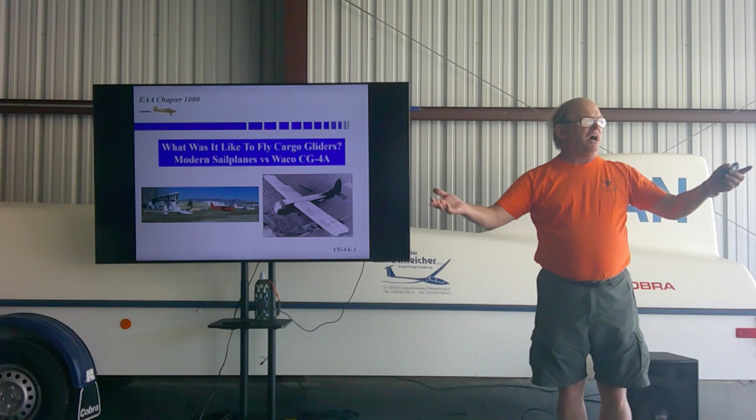Jeff. I originally created, or I'll talk some more about it, but I created this presentation for test pilot school way back in like 2009. And you will see through here, I'll refer to TPS, that's test pilot school, or TPS gliders. That was the way I was referring to what we would call the modern sailplanes, the stuff that's on the line over here, because that's what I was familiar with, and of course, all of you are too. So

I'm a retired major from the Air Force, retired back in 2003. I did go through the test pilot school as a flight test engineer back in 1989. I also taught in the Aero department at the Air Force Academy from 93 to 96. And I've been at the test pilot school as either military or civilian in some fashion ever since 1997. And Gary Aldrich helped get me checked out in gliders, and when he left, I became the TPS Chief Soaring Pilot

there. Some of you may have seen my airplane. This is a four-place Bearhawk that occasionally makes its way up here. I scratch-built it, had the first flight in 2008, the first real flight in 2009. This is landing at Oshkosh. 4 seats. The engine is essentially the same engine we have in the tow planes out here, except I spin it faster. So it goes up to 260 horsepower, and it's currently got about 920 hours on it.

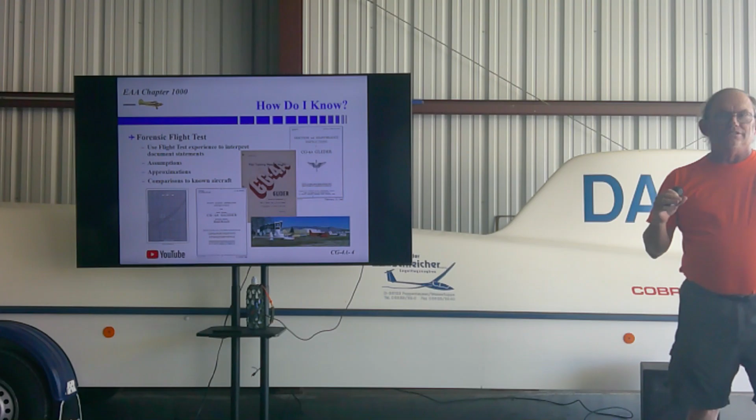So you might wonder, how does a young guy like me, okay, sort of young, you know, born in 61, how do I know anything about what a CG-4A was like? Well, I like to call this forensic flight test. Basically, I look through all the material that's available and try to get something out of it. Back in 2009, my dad was visiting the CG-4A that's now in Lubbock, when it was in Terrell, Texas, because it was closer to him. And he came across several of these documents, which he gave to me, which started this.

And then the book that Jeff referred to was many, many years later. Just recently, I thought, you know, I got this whole briefing, but I'm forgetting what I said. So I should write all that down. Well, I did, and it's almost 100 pages long. Some of those are pictures. One of the magic things that I found was in this book, the Pilot's Flight Operating Instructions, was this chart, which looks fairly innocuous, but it's a power required chart for the CG-4A. And that was sufficient information to pull out a drag polar, you know, L over D curves, and all that other stuff that you'll see coming up here later.

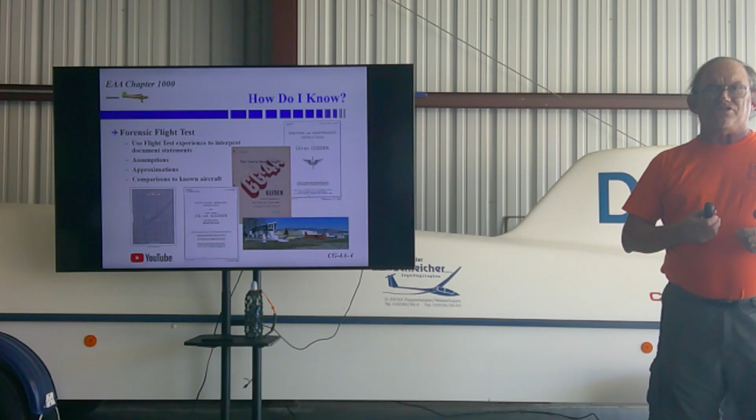Also, as a flight tester, I would read what was in the pilot manuals very carefully and try to worm out what are they actually saying there, and compare that with experiences that I had. Of course, being an engineer, engineers like to make assumptions. We don't know something, we assume. Take our best guess that we can. Also, we have available to us various approximations, equations for like flying qualities and so forth that I can apply to this as well. And then, of course, we're comparing it to known aircraft.

And finally, way down here, there are a bunch of videos on YouTube. Okay, that goes without saying, but there's a bunch about the CG-4A. In fact, one very interesting one that I'm going to mention when it comes up later and tell you how you can find it. Watch it too. Okay, so what are we going to look at? We're going to look at background info on the CG-4A. What was it? Why was it? Etc. We're going to give a description of what it could do and so forth.

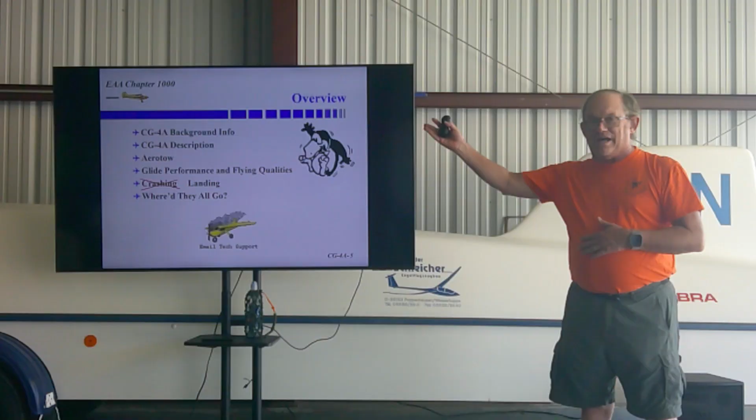And you will note nowhere up here is operational history. I'm not going to tell you about how it was used in the invasions or any of that other stuff. This is a pilot talk. This is for pilots and for you to imagine what would it have been like to get a chance to fly this. We're going to talk about towing, which it did a lot of, glide performance, flying qualities, crashing, landing, and then finally, well, where'd they all go? Why are there no military gliders or military glider pilots anymore?

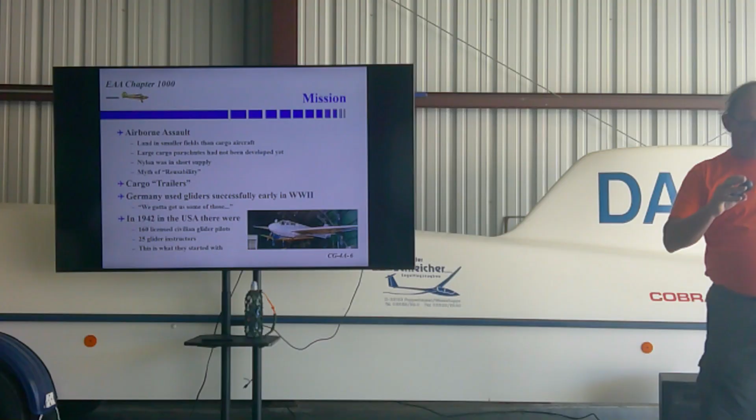Okay, so the mission was twofold. One, airborne assault. Get stuff into a contested area for the troops or equipment for the troops, and you're landing in fields that are too small to get your cargo airplanes into.

Too small to put, say, a C-47 into. Large cargo parachutes, we haven't invented that yet. Remember, parachutes were made either of silk, which is rather expensive and hard to produce, or nylon, which was a brand new concept in World War II, and it was in short supply. And we'll talk about where what we had did go.

Finally, there was this myth of reusability. This idea that you're going to go into a contested area, find an open field that the enemy kindly left available to you. You're going to land in there, unload your stuff with no damage to the glider, no problems, and then, oh, we'll come back later, pick it up, bring it back, and reuse it. By that word myth, you can probably guess that that didn't work out so well.

The other big thing that they seem to be used for was, I call it a cargo trailer. Think about many years ago when all of us were much younger, you had a car, like maybe a sedan or something, and you needed more space to carry stuff for some reason. So what'd you do? You go down to U-Haul and you rent a trailer and you put it behind your car and you stuff the stuff in, because why should I have a big pickup truck, which at that time was not very comfortable, or something.

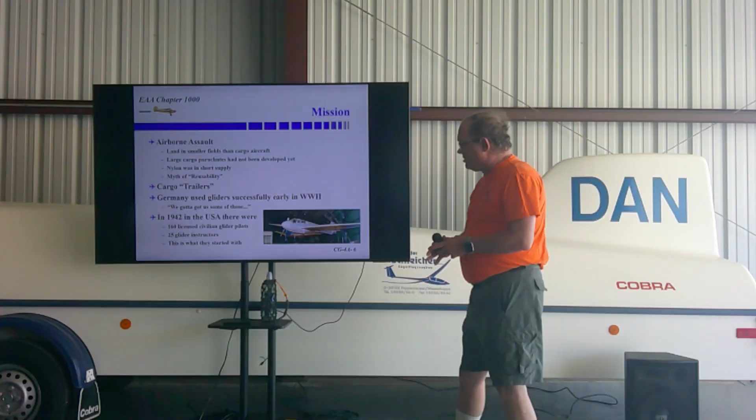The analogy is we had cargo airplanes, but a big cargo airplane, that's a C-47, which compared to what we use now, there's not a whole lot of room in there, and it's not easy to load and so forth. But we had a bunch of bombers and high-powered fighters and other stuff that we could drag a trailer around to carry stuff.

Well, and this wasn't our idea to begin with. Germany had some early successes with gliders. The assault on the Belgian fortress Eben-Emael, they had it all fortified around it, but they left the roof off. And they flew in some gliders, landed inside the fort. Those guys got out like the Trojan horse, took it over and let the rest of the guys in, and so forth. That worked pretty well.

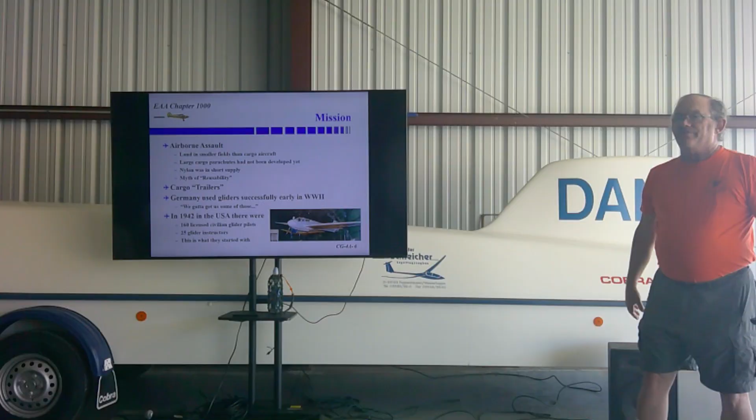Then Germany in 1941, realize this is before Pearl Harbor, Germany decides, we've got all these parachutes and gliders, we're going to invade Crete and do it in this new airborne invasion. They did it. They were successful, but it was a Pyrrhic victory. There were so many losses that Hitler decided that's way too costly a way to fight a war. We're not going to do that anymore. And all the paratroopers just became infantry.

However, the other side, the Allies, looked at that and go, look at what they're doing. We got to get us some of those. So suddenly, there was a new idea. We're going to get gliders. Okay, well, what do we have to go with?

And one of these CG-4A documents actually calls out that in 1942, right after Pearl Harbor, in the United States, there was a grand total of 160 licensed glider pilots. Most of them are right here. Of that, only 25 of them were qualified as instructors. So crap, how are we going to learn this? Well, that's what they started with.

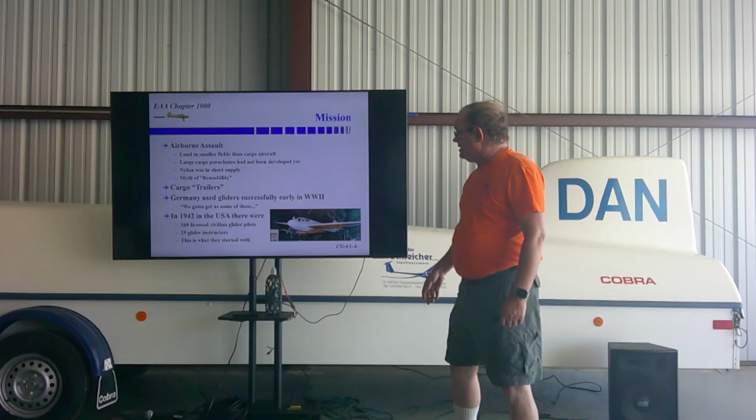And Ron and Jeff will tell you that their TG-2s were once in the military. And we've got 3 of you on the airplane. Oh, okay, I didn't know about the third one. Because the, I want to say the Air Force, the Army, basically commandeered them all.

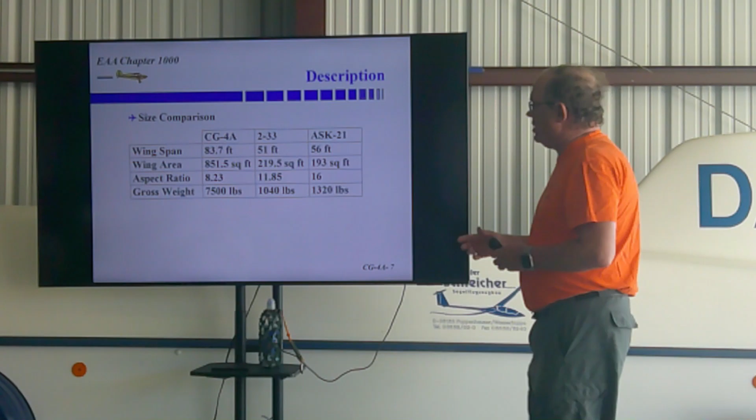All right, so how big is this thing? To start off with, I'm doing comparisons to the 2-33 and the ASK-21, which I'm sure most of us are familiar with. And you'll notice wingspans go 51, 56 feet, 83 feet. Okay, that's bigger. Wing area, 219, 190, 850, it's big. Aspect ratio, not very high, 8.2. I bet none of you have gliders that are that low. In fact, even these out here aren't that low.

I do. Oh, yeah. Hang glider. Oh, well said, and we'll come back to that glide ratio. But look at these gross weights, just over 1,000 pounds, 7,500. In a word, this thing is big. It's not something you're going to put in this hangar and just use for fun.

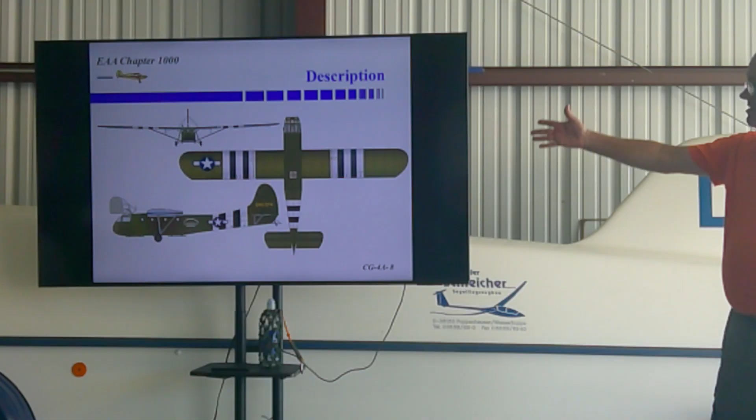Okay? Look something like this. This does not really give you a good idea of just how big that is. First time I saw one, I'm like, holy crap, that's big. In the paper, you'll see it's roughly the size of a C-47. Okay? So to give you a little intro, if you're not already familiar, and to remind you if you are, what we were doing with these cargo gliders, this is a little newsreel clip from back in the day.

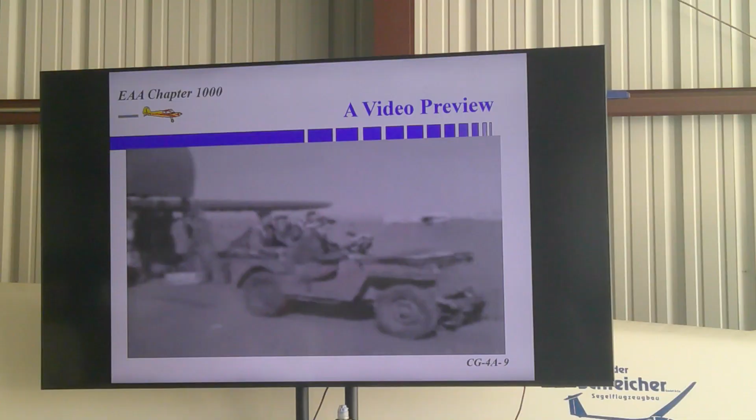It's training. It's uncontested. No tank traps. Yeah. Okay, so who was building these things? It wasn't Lockheed or Douglas or Boeing because they were busy building the other airplanes that you're familiar with. It was designed by Waco, the Weaver Aircraft Company, which strangely is not in Waco, Texas, even though I always think of it that way. I think it was in Ohio. It was intended to be built by many manufacturers.

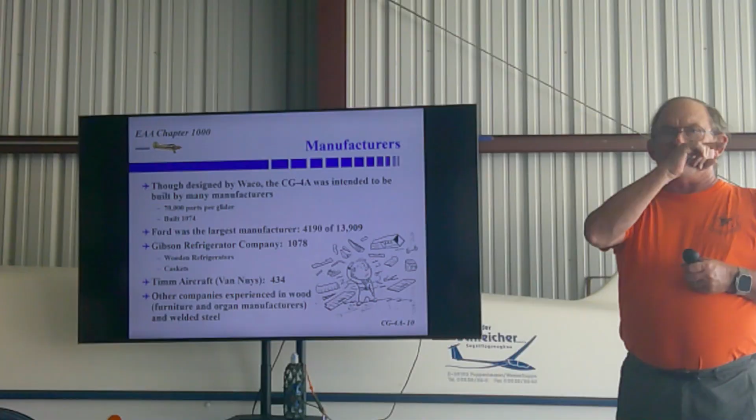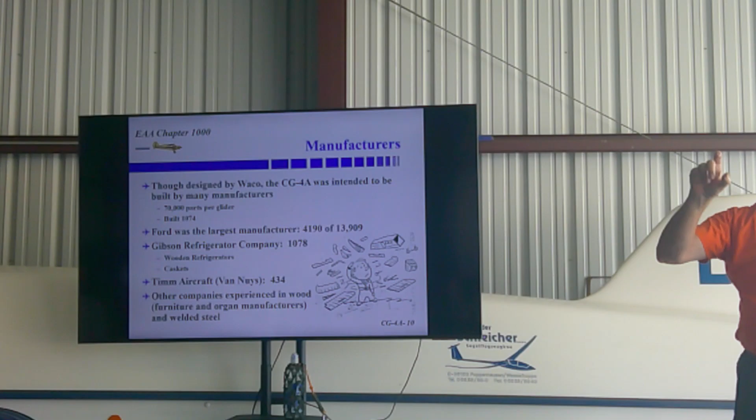Little side tangent, one of the books I read was Bill Norton's book on combat gliders. It is amazing how many other companies tried to design a glider without success. In America, this was about the only one that actually worked. There were 70,000 parts in this glider. I was just talking with Jeff about this. Tiny little pieces because you're trying to make this very lightweight.

Waco themselves built 1,074 of them. Ford, besides building B-24s, was the largest manufacturer, 4,190 gliders, and in total 13,909 were built. The Gibson Refrigerator Company, that sounds like an aircraft manufacturer, but they built wooden refrigerators. Apparently they also built caskets and so forth, so they knew how to work with wood. There was also steel in here, welding, so they figured out how to do that.

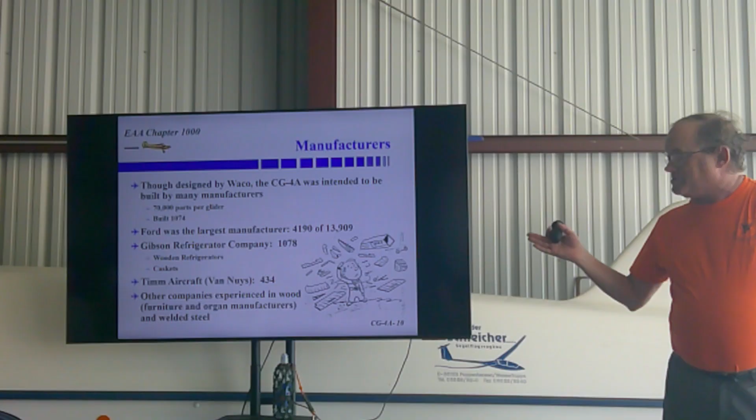I added this just last night. Jeff was telling me about the Timm Aircraft, which was just down here in Van Nuys, they built a respectable number of 434. And there were other companies that were involved, generally ones who were experienced in wood and welded steel.

So the limitations, the maximum design speed, 150 miles per hour, calibrated, or for those of you like me who prefer knots, 130. Empty weight, 3,600 pounds. Design gross weight, 7,500, which means a payload just under 2 tons, just under 4,000 pounds. The emergency gross weight was 9,000 pounds. You know, the Army and the Air Force have never overloaded an aircraft. Just all the time. 5,400 pounds of payload.

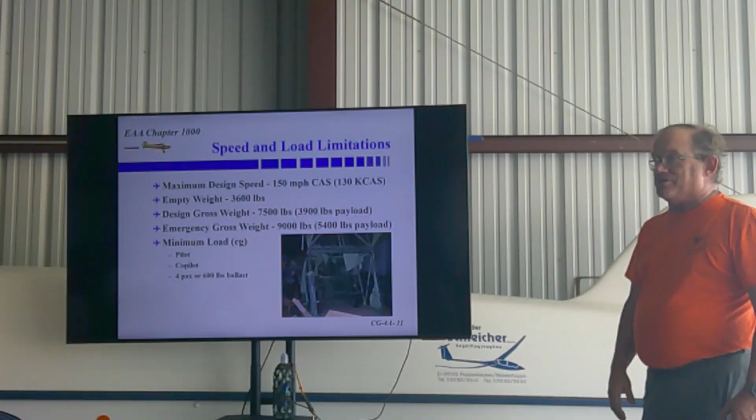The minimum load, if you wanted to go, the thing was tail heavy, empty. If you decided, okay, we're going to go out and do a training flight, you better grab several of your buddies, because you need 2 pilots up front, and you need either 4 people sitting right behind the pilots, or you need 600 pounds of ballast right behind the pilots in their place, just to get the center of gravity far enough forward.

So this is a cockpit. This is down in Lubbock. You see the 2 seats here with the control wheels, which hang from the ceiling. Up here are three knobs for adjusting trim, 3-axis trim. Of course, I'm sure you had to look up there, okay, which way do I go? Because it's just round and round. The tow release is right up here. You'll see some videos sometimes of the dramatic, you know, we're going along and the pilot reaches up and pulls down the tow release for that.

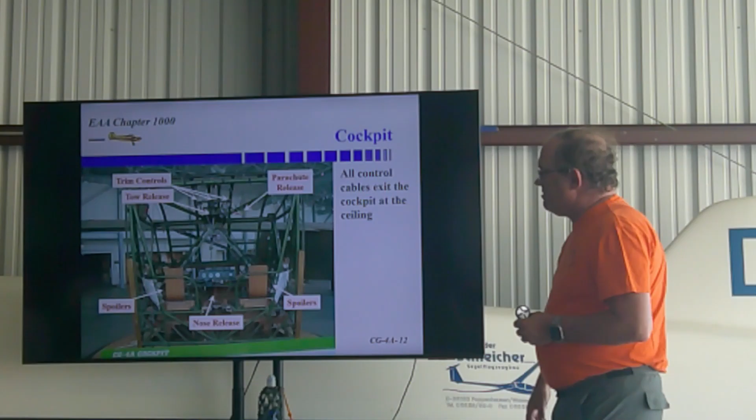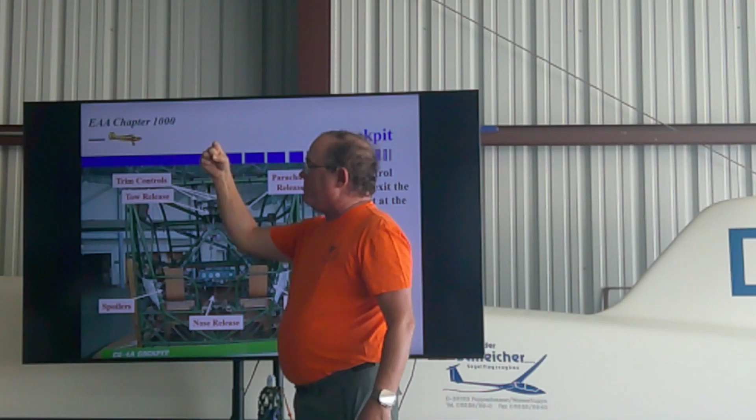Spoilers, the spoiler was a big lever on the outside of your seat. Down here on the floor, in between, was another lever that you pretty much wanted to make sure where it was, because when you pull it back, it released the nose, so the nose would open up. Which, you know, you're in the nose, it goes up. And because it goes up, it's hinged up here. That means all of these controls, all the cables, have to work their way up to the top to come out at the top, because that's where it hinges open.

Finally, there's also the parachute release here. We'll talk about that. That was an additional drag device. Okay, the instrument panel looks like this.

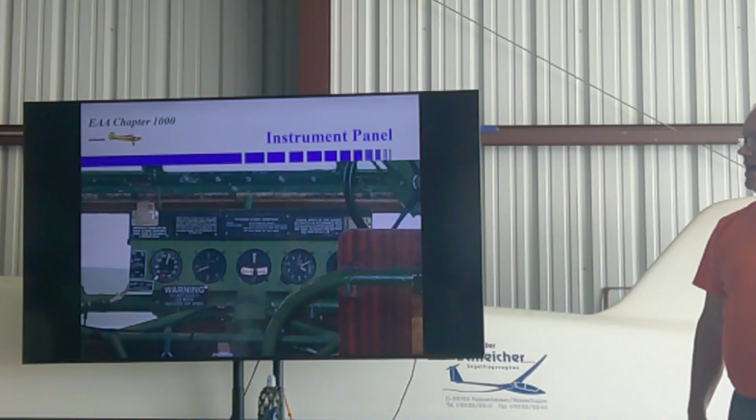Airspeed, rate of climb, turn and bank, which was driven by a Venturi. It was vacuum driven by Venturi on the side. Altimeter and a compass. And I had this nice picture of it installed in the airplane, and Doug did me one better. He has one. It's over here on the table. You can see it, which he tells me has all original instruments in it.

Cargo, what can I put in this box that's behind where the pilots sit? Well, you can put 13 fully equipped troops. We have a picture here of 12 troops and 1 prisoner from EAA Chapter 1000 many, many years ago. Just to give you an idea, yeah, they don't have all their gear, but you can see how many people that is. And that's 13 guys in the back, okay? That's not counting the 2 pilots up front.

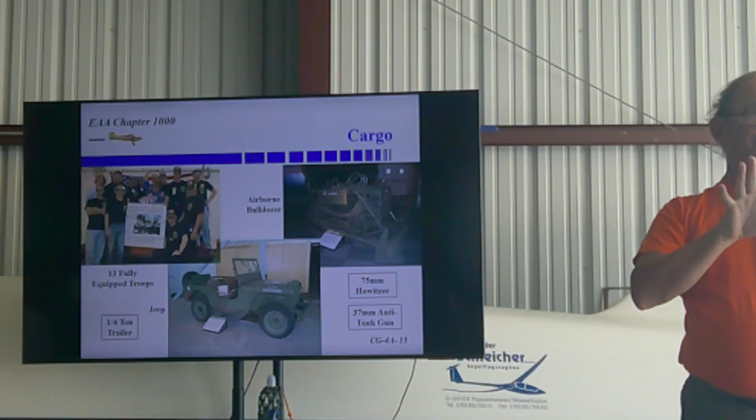The classic CG-4A cargo was the Jeep. And I'm pretty much convinced that Waco designed the aircraft around the Jeep, because when you stuff it into that hole, there's not a lot of gap around it. There was the airborne bulldozer. This thing was about 5,000 pounds. If you go back a couple of slides, you put one of those in the Waco CG-4A and 2 pilots, and you are at the emergency maximum gross weight. It's been noted that pilots did not like flying those because it was so heavy, thus very sluggish and so forth.

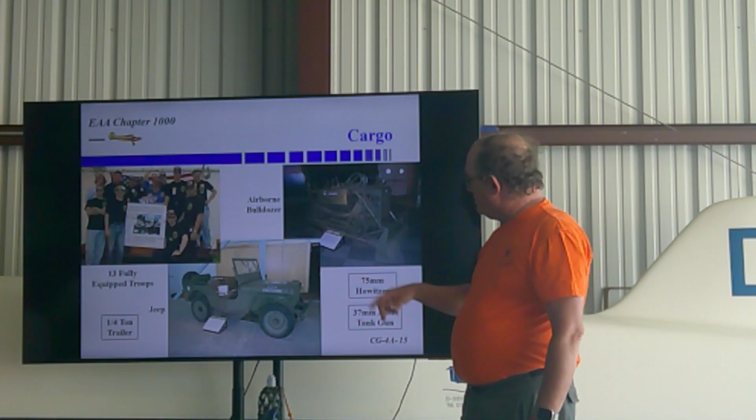Other things, I don't have pictures here, but there's more details in the article. 75 millimeter howitzer, 37 millimeter anti-tank gun, the quarter-ton trailer that goes with the Jeep. Those were all things that could go in. There is a wonderful video on YouTube, I'll tell you how to get to it later, of essentially how to load a CG-4A. It's a training film. It shows troops putting in a Jeep, not the dozer, but the Jeep, the trailer, and 75 millimeter howitzer at least. And yeah, the baker bowline was a knot that I was not familiar with, but that comes up very important in doing that. It's a cool knot.

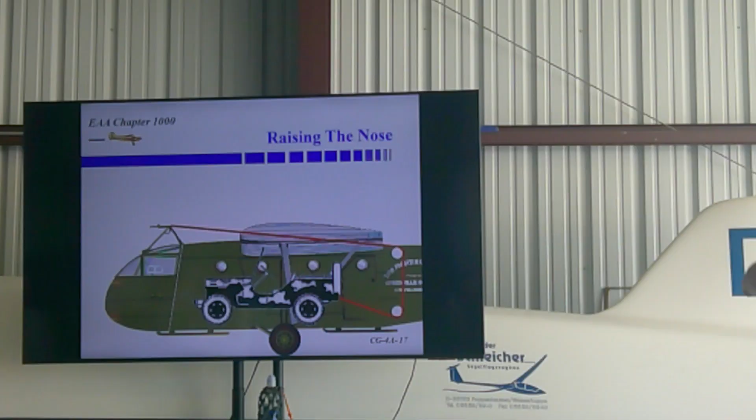Okay, raising the nose. I said the nose comes up, is hinged right here. You can see a little Jeep in there. And this is at the Silent Wings Museum in Lubbock. And you will note that they have put this on display, having run into a tree or pole or whatever, because that's kind of the way you landed these things, was you landed and ran into things because there were things to run into.

This is one of the coolest design ideas, I think, for this. On top of the nose, there's this tripod, which, as the guy who teaches pitot-statics at test pilot school, I of course immediately noticed that that's where the pitot-static tube is, which, strangely enough, is the exact same pitot-static tube as on my airplane. But its real purpose was to help open the nose. You put a cable attached to that that came down into the fuselage. Back over here, there was a sliding piece of metal on a tube that essentially was a brake that was attached to it. It went over a pulley, down to another pulley, came up here, and had a hook that you attached to the pintle hook of the Jeep.

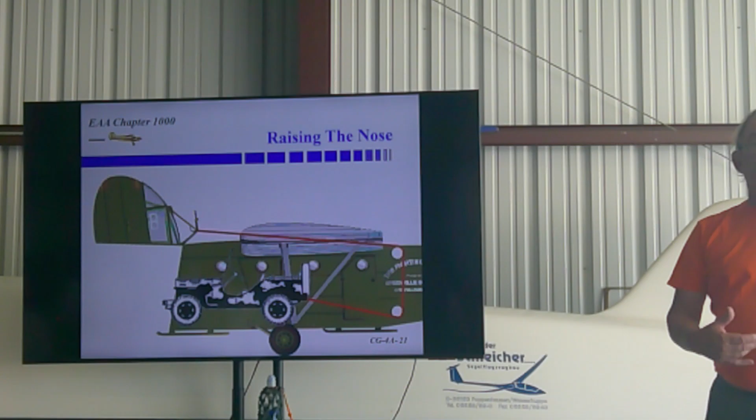And why would you do that? It's not to keep the Jeep there, it's to get the nose out of the way. Because if you can imagine in some high-tech animation here, you want to get out, you release the nose, you fire up the Jeep, and you start driving forward, and it pulls the nose up. With the pilots in it? Generally, the pilots have gotten out of the way by now. There is the problem if the Jeep is not tied down well when you crash land, that, well, it might do the same thing again. When you get to about here, there's another cable that's connected to the release that releases it from the Jeep. The lock over here holds the nose open, and you just drive right on out.

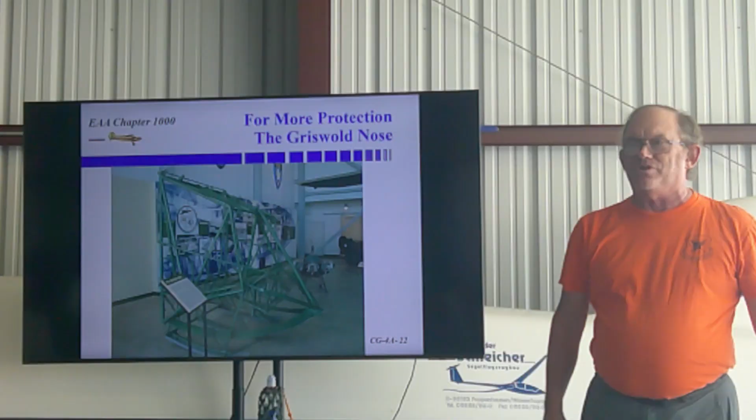That's hilarious. But if you look at that nose and its structure, it's not really crash-worthy. So one of the modifications that was made, this again in Lubbock, is the so-called Griswold nose, because Griswold was the company that made it. Basically they added a lot more steel out here in front to provide resistance for head-on collision. They also moved the tow hook from up here down to here, which supposedly didn't create so much nose-down pitching

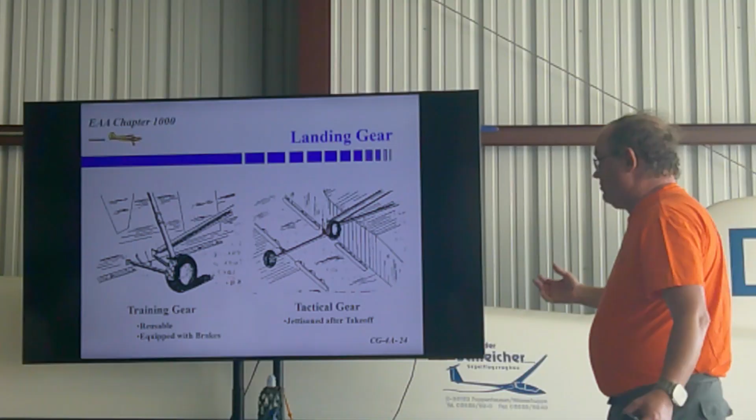Landing gear. The glider came shipped with two types of landing gear. One was so-called training gear, which was this tripod that bolted onto the side, and it had brakes. When you're in training, you come in, land, brake to a stop, hook it up, go again, and so forth. The original idea for tactical use in the war zone was, instead of this rod with two wheels on it, you would take off, and after you got up to a little bit of height, you'd jettison the wheels to reduce the drag. And then these skids are what you would land on.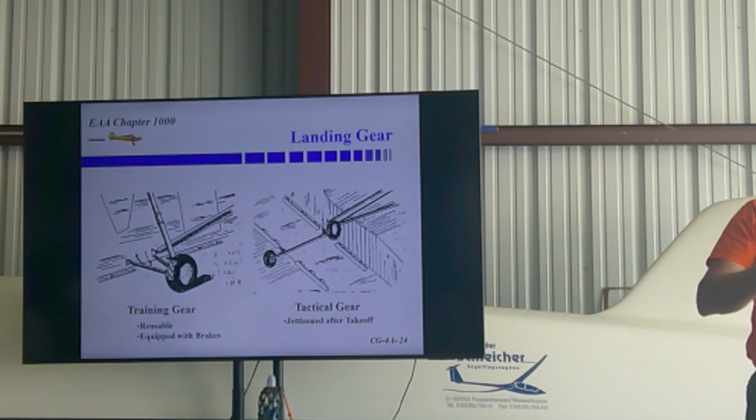They found out, you can probably see this yourself, if I land on skids, I'm just sliding across the ground. I don't really have any directional stability, so I could easily end up sliding sideways on those skids. They found that the directional control when landing was actually better with wheels, so you could try to avoid hitting that other glider. So in the end, when they were actually used, most of the gliders still had the training wheels. But the extra drag must have been horrible, right? Almost imperceptible.

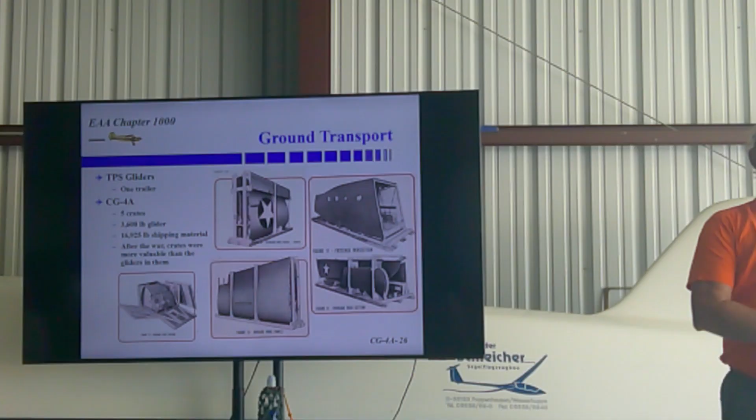The glider itself, its empty weight, 3,600 pounds. The shipping material was almost 17,000 pounds. I'm not going to do the math, but that's like 4 or 5 times more weight in shipping material than actual glider. And as the war economy goes, we're building these things like mad and pushing them out, and a bunch are just sitting around. Victory, we're done, yay. What do we do with all these? Auction them off. The story goes that most people who bought these gliders had no interest in the gliders. They wanted 17,000 pounds of high quality lumber.

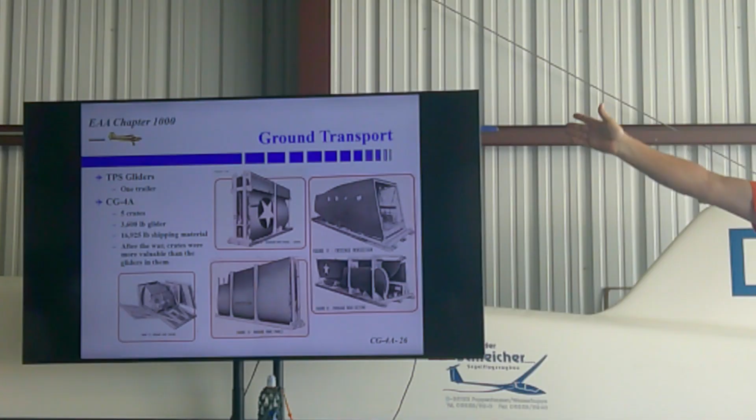Jeff has told me stories about using the boxes to make sheds, buildings. Some people made a house out of it. Some people took part of the glider and modified it a little so it became their hunting shed or whatnot. In the article, I give you an idea of how these boxes compare in size to the shipping containers you see on the railroads, to help you get an idea of how big it is.

How do I get this thing in the air? Well, here we use the mighty Pawnee, which has 235 horsepower at sea level. Not sea level. For the CG-4A, typically a C-47. There were other airplanes used as tugs, but the C-47 was the most common, to the point that in all of the manuals, when it shows a tow plane, it's a silhouette of a C-47, which is 2 times 1,200 horsepower.

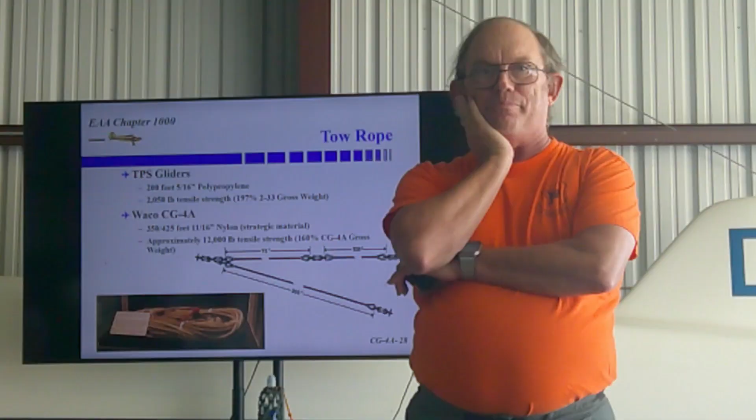The tow rope. The tow ropes we use here are 5/16 polypropylene, roughly 200 feet, until I keep putting new ends on them and they get shorter. The tensile strength, okay, quiz time. What's the required tensile strength on a tow rope? What it says in the manual. Okay, what does the FAA say? 80% to 200%, twice the gross. 80% to 200. You said 2,000. Well, yeah, sorry.

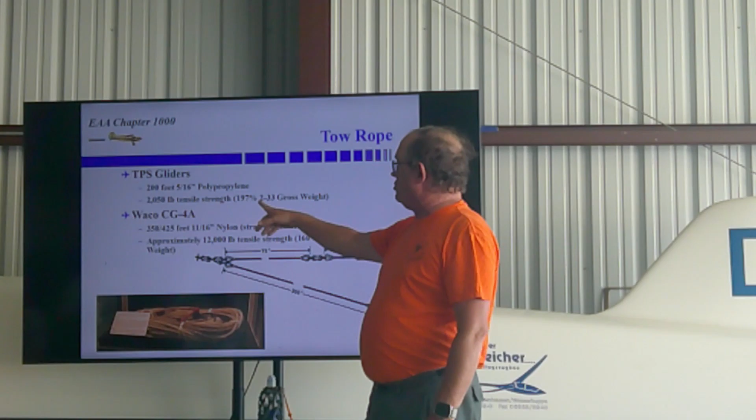With that in mind, these ropes have a tensile strength of 2,050, which is just under 200% of a 2-33 gross weight. Okay, great. For the CG-4A, this rope here is 11/16 nylon. That's one of the places we use that nylon.

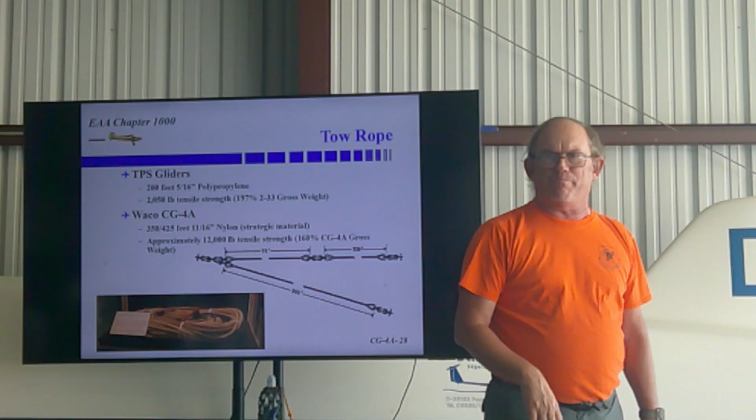The tow rope was a strategic material, coming in 350-foot lengths. If you were going to use it for a dual tow, you had a 75-foot length added to make one longer than the other. Tensile strength was 12,000 pounds, which puts it at about 160% of the Waco CG-4A normal gross weight. So these all fit in the rules we just stated.

How do you attach it? I'm told by people who should know that the tow hook was not a modification to the C-47, it was an installation. That meant this cone back here, you just took it off and stuck this in, bolting it onto the structure that was already there. If you didn't need it anymore, you just unbolted it and took it out.

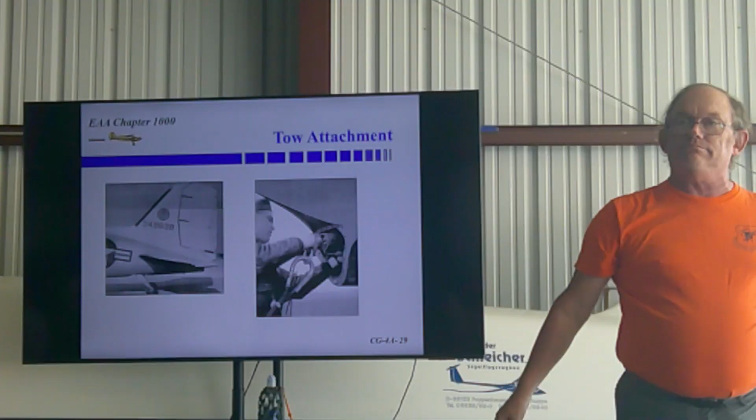Where's the tow hook? Where do we pull from? The 2-33 we pull from underneath. Any of you who've been on the tail as the tow pilot went a little too fast fully understand that. The CG-4A, it's actually up on the top, which gives you a nose-down pitch.

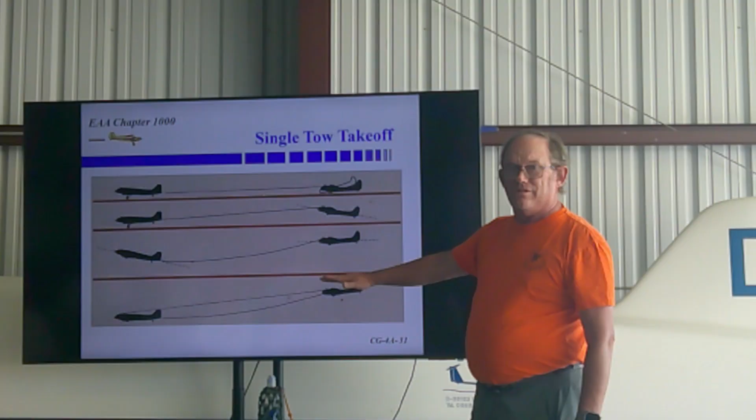We would normally be about here in the high tow position, level with the tow plane. For reasons I haven't been able to find yet, the CG-4A flew higher on high tow. In fact, your sight picture was to put the top of the vertical fin on the astrodome at the front of the C-47, meaning your picture looked something like that - you're looking down on the tow plane.

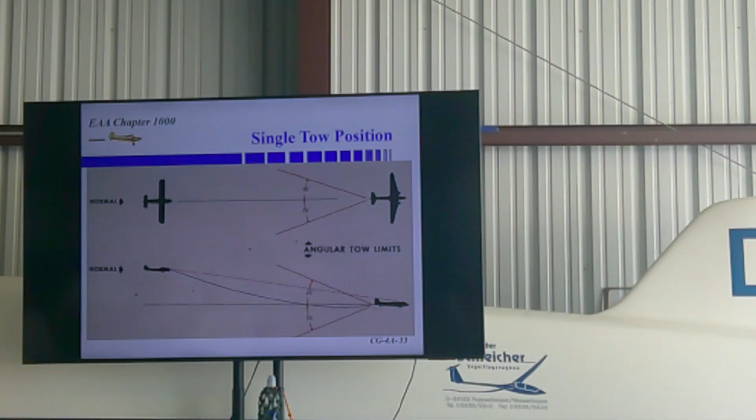Where are your limits? What's the size of the box? Turns out this is 20 degrees either side, 25 up, 20 down. This is bigger than the box we teach here. So it's actually fairly large.

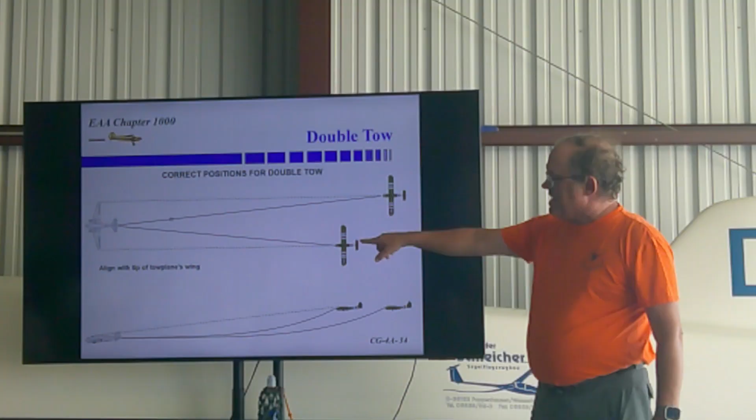A C-47 has enough power, especially if it's not carrying anything inside, to tow two of these things at the same time. Don't even think about it - but as I said, you got one line 75 feet longer, which typically went on the right side. With two gliders, your position was to move laterally until you were lined up with the wingtip on your side, both still at about the same height.

Crosswind takeoff, again just like you're used to. You start out, glider comes up and crabs into the wind to stay over the runway. Then the tow plane lifts off, also crabbing. Once you're past all the obstacles, you line up behind it and just crab the whole formation.

Airborne pickup - this goes to that myth I mentioned about reusing gliders. Hundreds of gliders, I don't know the exact number, flew into Normandy for the invasion. After the front line had moved away, someone decided there was a lot of useful stuff there and said, let's go recover whatever we can.

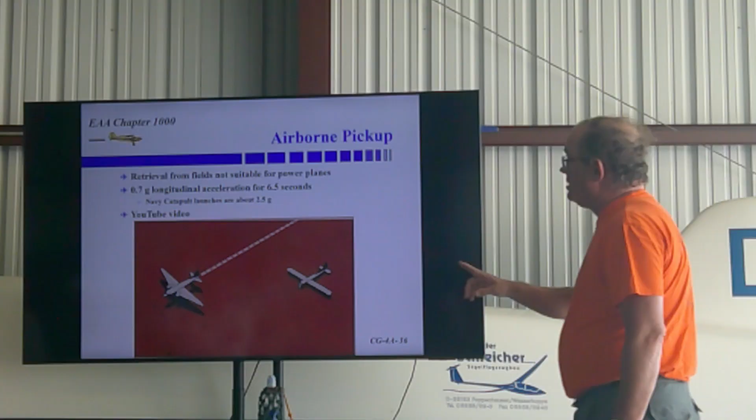So this C-47 flies over with the hook hanging out, grabs a loop, and starts yanking you into the air. The acceleration was reported longitudinally at 0.7 G. If you've ever done a Navy cat shot off a carrier, which you probably haven't, I actually did one once, that's 3.5 Gs. So 0.7 Gs, if you want to imagine that, go lean on your stairway or get a chair that's leaned back about 45 degrees. That's what it feels like. It's not really a lot.

There is an absolutely wonderful YouTube video available out there that details this whole thing - how it was set up and how it was flown and so forth. And the best part was that the video was narrated by a relatively unknown captain by the name of Ronald Reagan.

So this wasn't just a hard hook on the airplane. You needed to give some relief to that. The system, which is detailed in this video, was called the Model 80. They couldn't come up with a better name. If it was today, it'd have some cool acronym that spoke to what it did. But no, every source I've seen, Model 80.

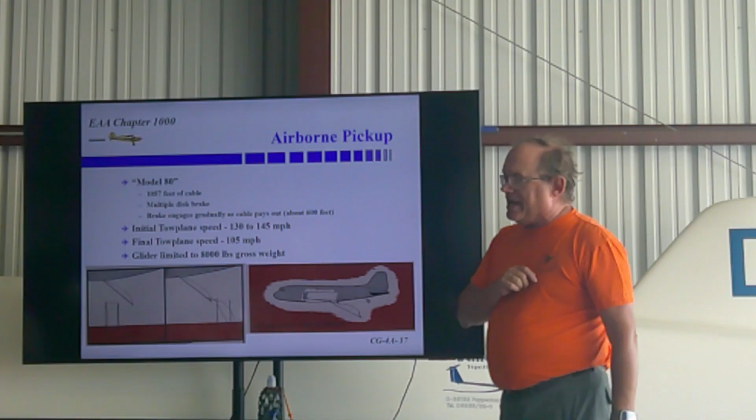1,057 feet of cable, had multiple disc brakes on it, and what would happen is it would be set up so that when the hook grabbed the line, it would start letting out cable, and it would slowly pull the brakes in to accelerate the glider.

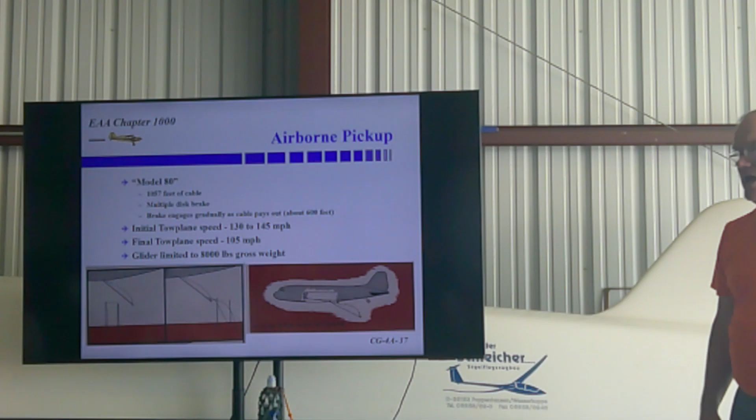You usually ended up with about 600 feet of line out. That's a long tow rope. The initial tow plane speed as they're coming in to grab that, 130 to 145 miles per hour. As they snatch it, full power, full climb power, go, this thing starts feeding out, the glider comes. When you're done and stable, you've slowed down to 105, even though you added all that power. So there's a lot of inertia going on.

Glider couldn't be any more than 8,000 pounds, but generally if you're taking it out, well, you might have some wounded or something in there, but it's not going to be excessively heavy. And that's below the normal gross weight anyway.

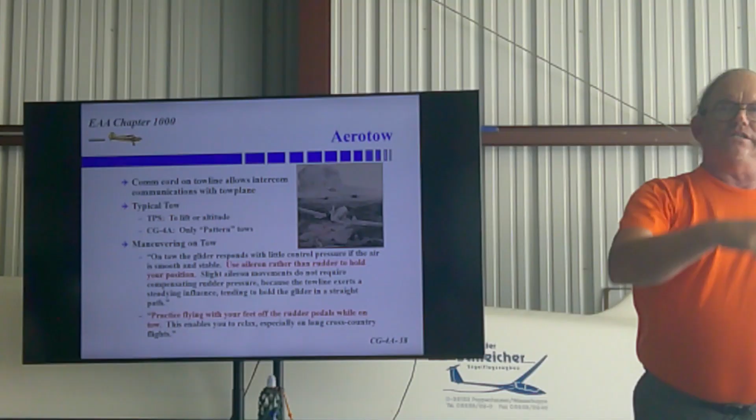On aero tow, sometimes on the tow rope, there was a comm cord wrapped around it that plugged into the C-47 and to the CG-4A. So now you were connected to the intercom with the tow pilot, which is really cool because that way you didn't have to use a radio, you didn't have to interfere with everyone else, and the bad guys didn't hear what you were talking about.

How do you typically tow? Here, we tow up to a particular altitude or to where the lift is and we get off. CG-4A, I say it's basically a pattern tow, but it's a pattern tow with a long drive. So imagine if you could, without the mountains here, taking off here, going to 1,000 AGL and flying to Sacramento or something.

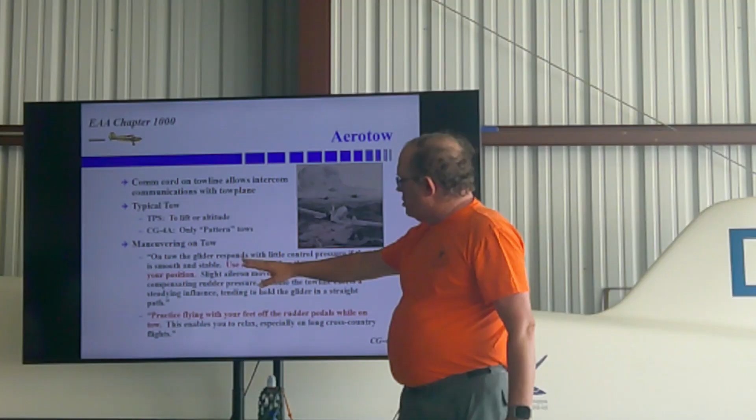Maneuvering on tow, this is interesting. It says use aileron rather than rudder to hold your position. The more and more I've thought about this, it's not explicitly called out, but I'm thinking this is talking about the double tow - that to stay to your side, they're saying just to bank outward. Because that way you can get to a zero control force instead of mashing on the rudder all the time.

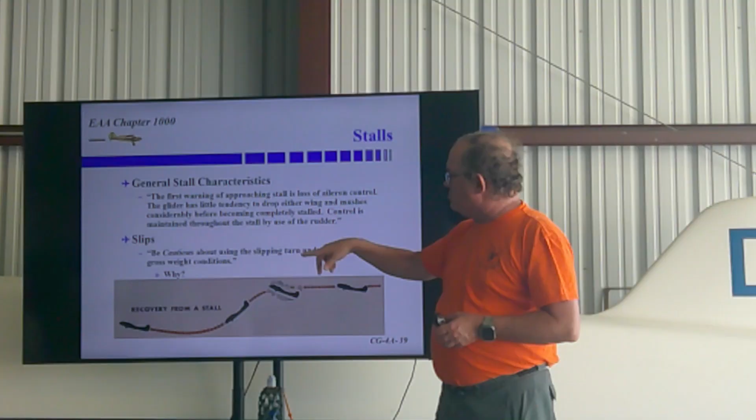That should all work. Stall characteristics is straight out of the book. The first warning of approaching stall is loss of aileron control. So your ailerons start getting mushy. It's a straight plane, so it starts stalling out of the tips. Has little tendency to drop either way, mushes considerably before being stalled, and you can control with the rudder for that.

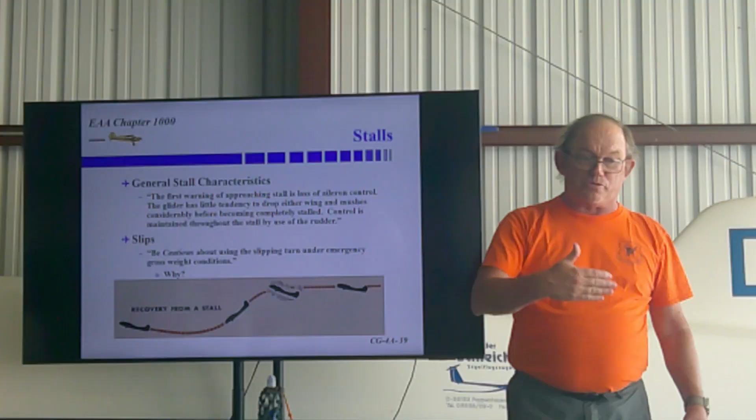It does have an interesting warning. Be cautious about using a slipping turn during emergency gross weight conditions. Any idea why? Running out of rudder. Yeah, you're already at a slow speed, very close to stall. And so if you're in a slip and you do stall, you're going into an incipient spin, and you do not have altitude to recover.

Okay, glide performance for our gliders, reasonably good. The CG-4A, I think, slightly better than the Space Shuttle or a rock. Actually, it's not quite that bad. In fact, I was thinking about it - Jeff's Bonanza sitting right over here in idle power or power off, it's about the same glide ratio. And we're going to see actual numbers of this.

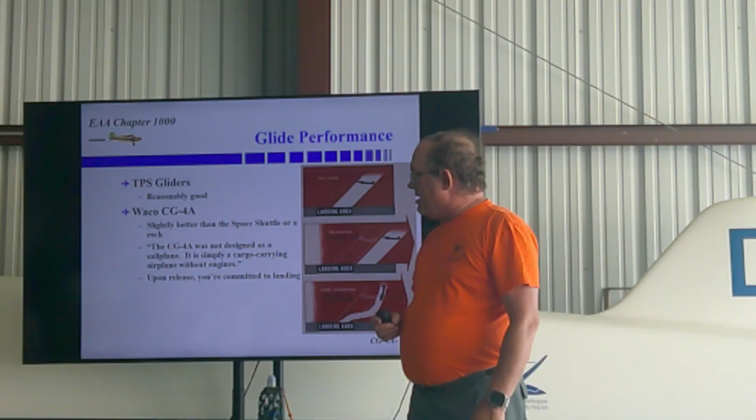There's a comment in one of the manuals: the CG-4A was not designed as a sailplane. It is simply a cargo-carrying airplane without engines. And there's no, well, I would say there's no soaring. Rumor has it that in training, some guys actually did gain altitude.

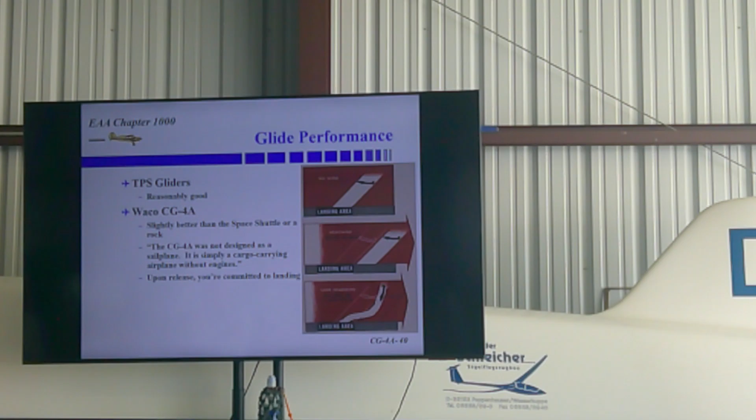Some years back, we had in attendance at least two of the old timers who had been instructors at 29 Palms. They told us about a flight where they were done doing what they had to do, and it was a gloomy day. They were up for 3 or 4 hours, and I think they came back before the search light came out. I'm guessing they were pretty lightweight. Oh yeah, oh yeah.

By the way, the pilot who did soar at CG-4, that was Dick Johnson. He knows a few things about soaring.

There's a story of one of the early national soaring champions. He was flying from somewhere to somewhere, I think out of Dayton, Ohio to somewhere else. The tow line, he had 10 troops on board. The tow rope broke, and he actually soared the rest of the way to Dayton. Talk about getting airsick in the back. So there was a number of...

Yeah, but still, in general, it's not going to work as well as your glider.

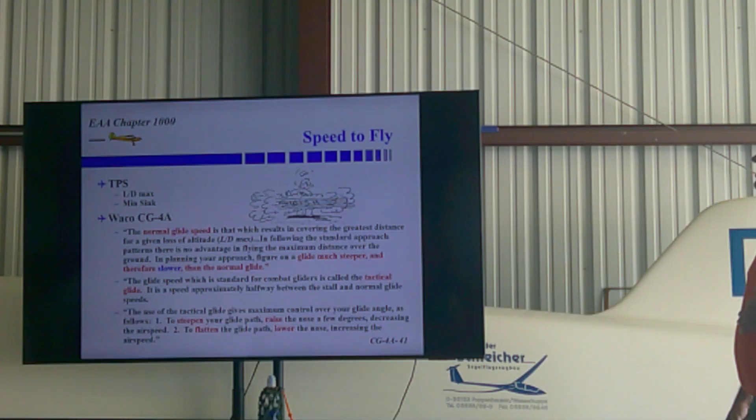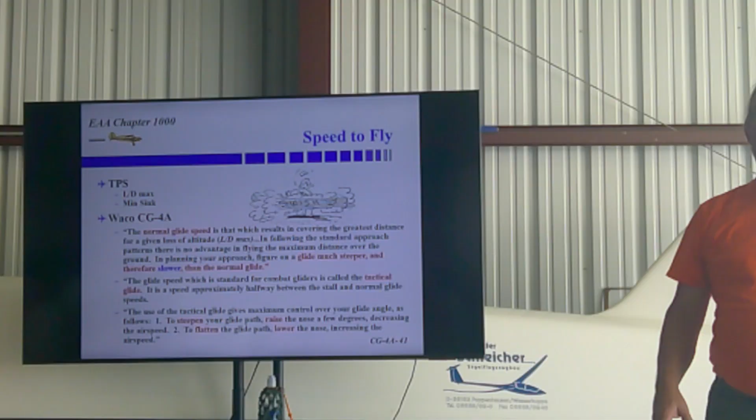All right, speed to fly. We're used to talking about L over D max, or best glide, and min sink. For the CG-4A, the book talks about normal glide speed, which essentially comes out to be your L over D max. But that's not your approach speed. There's no advantage in flying the maximum distance over the ground, especially when you just released right over your target landing spot. The glide speed used standard is the tactical glide, which we're going to see turns out to be right around min sink. Not because they were interested in staying up long - people shooting at you, you don't want to be up there - that's just kind of where it hit, because they wanted something between best glide and stall.

Notice this reading here: you're on approach, to steepen your glide path, raise the nose; to flatten the glide path, lower the nose. Wow, that's backwards from what you're used to.

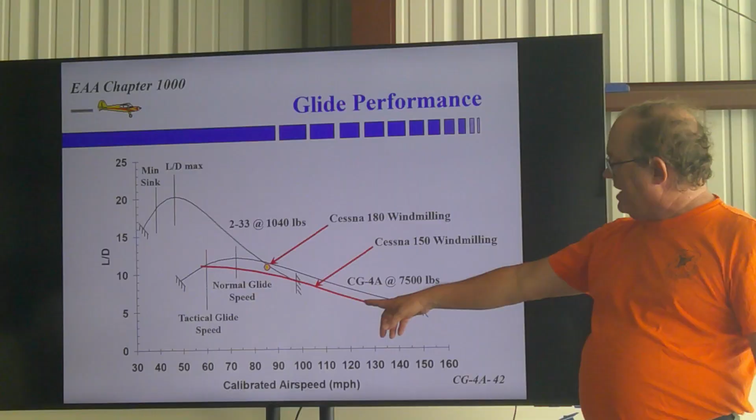As far as your glide ratio, the Cessna 180 manual tells you windmilling, it'll glide right there. Some tests I did on a Cessna 150, right about there. It's right in there with typical general aviation airplanes.

The airfoil - I used to think this was a way funky airfoil. By that number, it's designed with a lift coefficient of 0.6. Most airfoils are like 0.4, 0.2 or less for their least drag. And you'll notice it's got kind of this wonky shape.

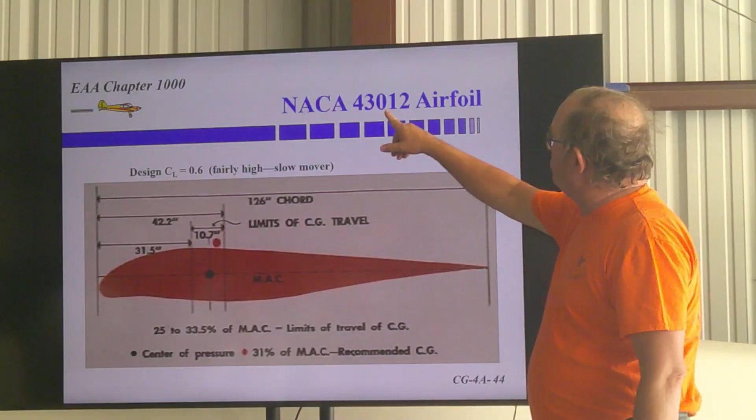But it turns out that the 43012A, which just kind of flattened this part out down here and adjusted this to keep the same center line, is what you got on the 2-33. And a lot of other airplanes or gliders use a similar standard airfoil, because it works really good for gliders, since we fly at low speed at high lift coefficients.

The camber keeps the required angle of attack lower, and the droop leading edge acts kind of like a leading edge flap for keeping the flow attached.

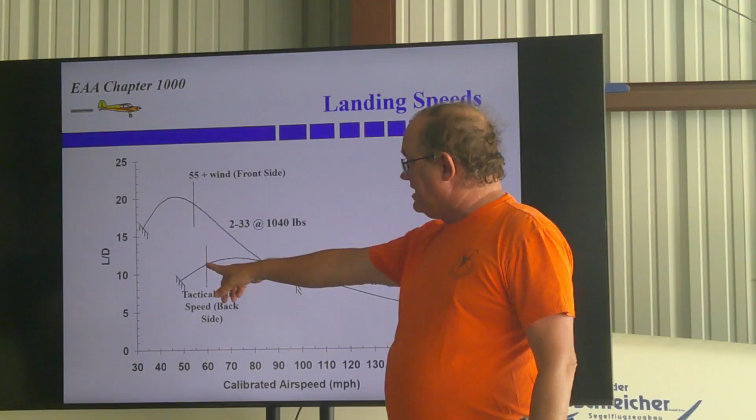Landing speeds - in say a 2-33, if you need to go down more, well, you can pull the spoilers out, but you can also push the nose down, which is normal piloting, even though we teach backside techniques - flight path here, airspeed here. Now, the CG-4A, you can see here, if I speed up, I get a better glide ratio; if I slow down, I get a worse one. It's a different way of thinking. But then again, glider pilots who probably haven't flown anything else, this is what they're taught, so that's all they know. Landing speeds, we typically come in pretty fast.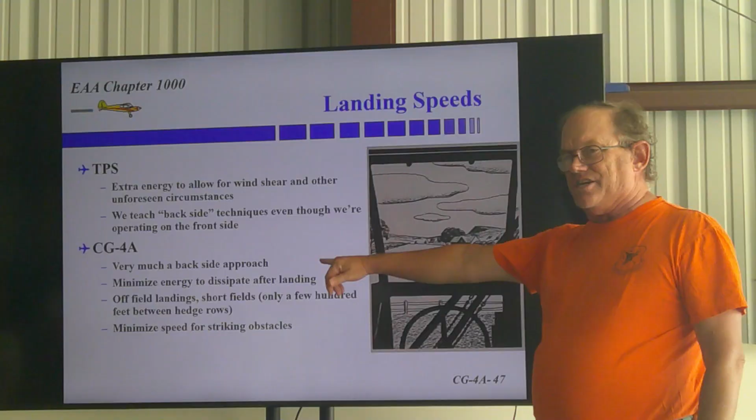By comparison, so we have extra energy to deal with wind shear or any other unforeseen circumstances. Like I said, we teach the backside technique. The CG-4A is a backside flight. And remember, when you land, you're probably going to run into something. Either another glider, a hedgerow, a pole that the Germans have kindly left there for you to run into. There's not a lot of room.

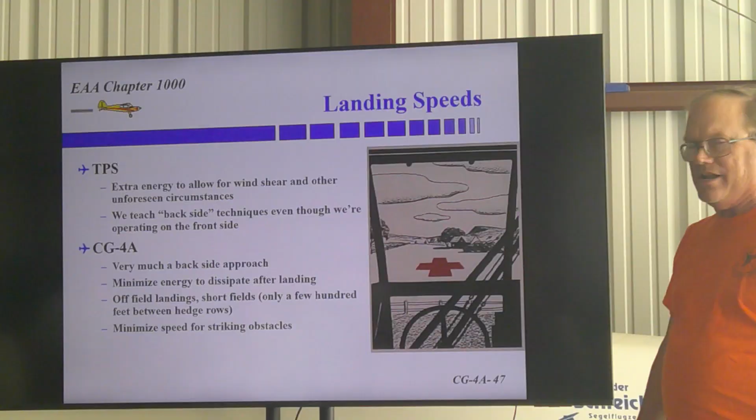So what do we say? Crash into the softest thing you can find as slow as possible. So you want to be coming in slow. Oh, this picture is out of the CG-4A manual, and there's your landing point. It always struck me, it's not very far until you run into that house.

Flight path control, there were spoilers on the top. In the paper, there's some analysis of how effective they are. Nowhere near as effective as you're used to. But when you're already flying at an L/D of 12 and the spoilers take you down to 10, you don't need to lose that much L/D. Slips work, big boxy fuselage, and there was a tail parachute.

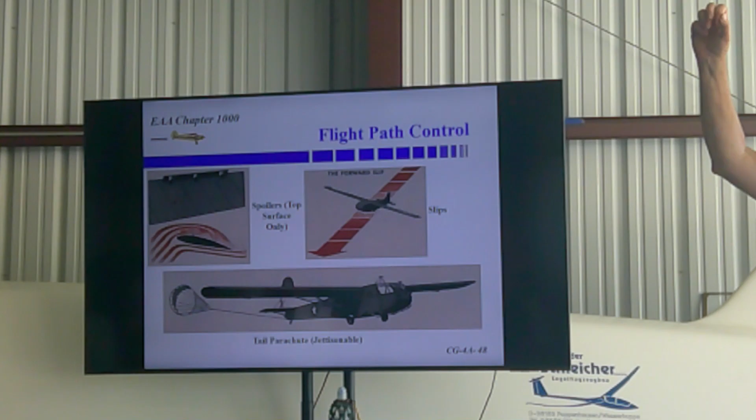Obviously, one-time use. You're coming in, you decide, oh, I'm too high, you deploy the parachute, gives you lots of drag. That analysis is also in the article. You start going down, and when you get scared, you pull the other thing that releases the chute, and then you're done with it. If you planned it appropriately, you may not use the chute at all.

Landing patterns, these are all shown in the book. You notice they all, no straight-ins, they all have a turn. Why? Because with turns, we can adjust our flight path. If we're too high, we turn late. If we're too low, we turn early, sort of thing.

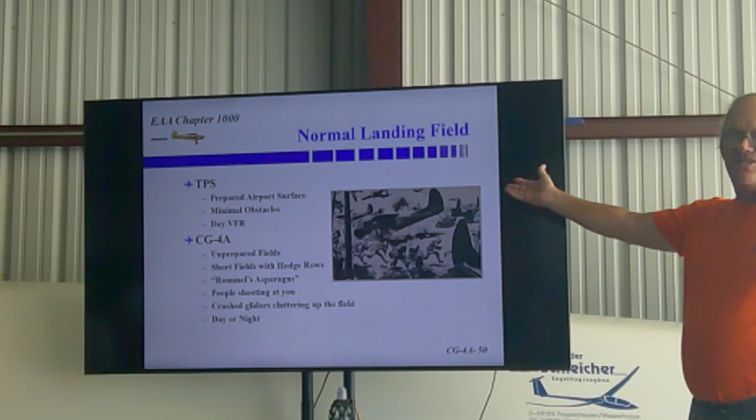The normal landing field, for us, nice prepared surface, minimal obstacles, it's day VFR, life is wonderful. These guys, unprepared fields, short fields with hedgerows, and when I say short, we're talking less than 1,000 feet. Rommel's asparagus, yeah, the Germans were no dummies. They looked around and go, if these guys have gliders, this would make a great landing field for them. So they basically go out and erect a bunch of telephone poles, which was called Rommel's asparagus, for you to run into.

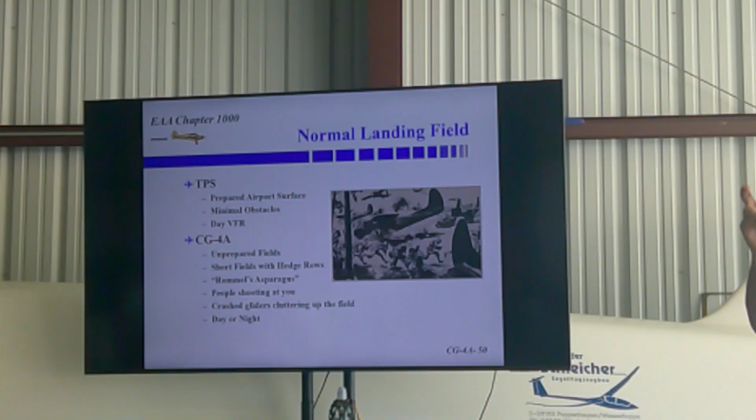Oh, of course, there are people shooting at you, and unless you're the first dog in, there's a bunch of gliders in the way already taking all the prime spots. And, oh yeah, you might be doing this at night. The normal landing outcome for us, we're code 1, ready to go again. Hook it up and let's go.

For CG-4A, as we already kind of mentioned, yeah, it's a crash. You're going to be Class A. And it didn't help that the guys you just carried into the war zone, they got out and figured, this is expendable. No one's going to use it. They start cutting off pieces of fabric or taking parts away for souvenirs.

All right, so how do you train for this? We mentioned the TG-2s, that we have several here on the field. Originally, the Army commandeered all of those and thought, we'll use these to train glider pilots. You might also be realizing that even a TG-2 glides way too good to model this. I already said they fly kind of like a GA airplane at idle or no engine.

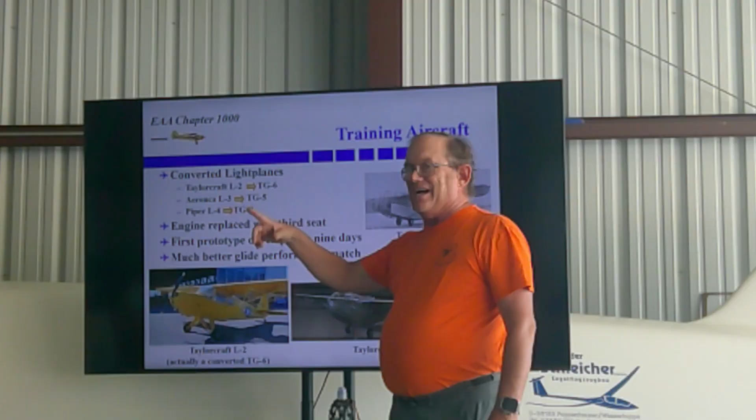Well, someone got the idea, they started converting a Taylorcraft L-2 such as this, which actually was converted back. You take one of those and you make one of those. You take the engine off, you put another seat up front to take care of the weight and balance. So now you have 3 seats. So you have the student, the instructor, and another student observing. And you can do that with an Aeronca L-3 or a Piper Cub.

The first prototype was developed in 9 days. Wow, that's pretty amazing. I think it was Jeff here who told me the reason that happened was that the manufacturers were pumping out all these airframes and they were all sitting out there waiting for engines. Well, if you've got an airframe already, you can just go out there, grab one, put some stuff on the front, doesn't take long. And the glide profile was a much better match. I think this picture I took at Pima Air Museum.

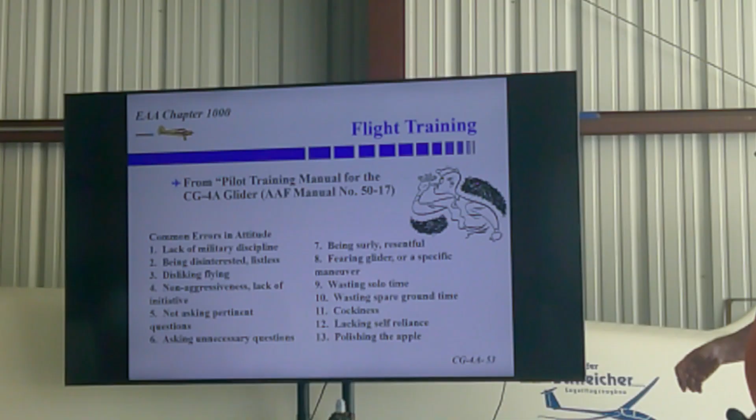Let's see. Yeah, we got just a couple minutes here. This is just funny to me. Out of the training manual, these are common errors in attitude: lack of military discipline, disliking flying, not asking pertinent questions, asking unnecessary questions. Oh yeah, out of control. Polishing the apple, basically sucking up to your instructor. Errors in technique, in judgment, slow understanding, poor attention. Yeah, basically nothing's changed.

Okay, so we'll finish up with, Russ, this is great stuff. I want to go see one. Where can I do that? One of the best places, the Silent Wings Museum in Lubbock, Texas. It's the old terminal for the commercial airport. There's, of course, another terminal now, but this whole place is full of stuff. That's where this glider is.

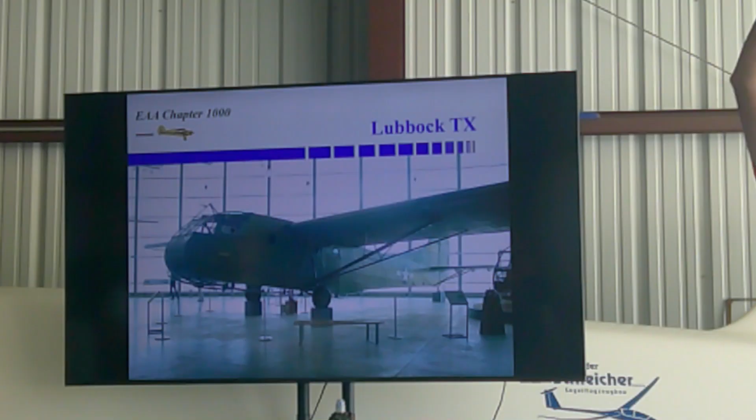This glider was actually retrieved from sitting on top of a tire store painted as a big sign. And there's a video of them taking it off the top of the store to bring back. It was god-awful in its look. Of course, the National Museum of the Air Force in Dayton, they have one. Theirs was built by the Gibson Refrigerator Company.

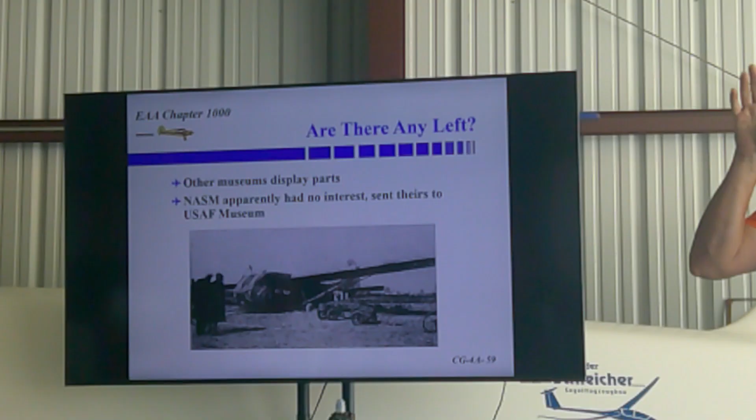Some other museums have replicas. There may be a few other actual ones. I know one museum, I think up in Michigan or something, has one side all open so you can see what's inside. Apparently the National Air and Space Museum had one, but they weren't interested, so they sent it off to the Air Force Museum.

So why don't I go down to Edwards and see a bunch of cargo gliders being tested and developed and all that other stuff? Well, remember what the roles were. One, the trailer. We built better cargo planes. The C-54, the DC-4, which didn't really reach its stride until the Berlin airlift, first flew in '42, was in development. That was bigger. And of course, now we've got things all the way up to C-17s and C-5s and so forth. So we found better ways to move stuff around.

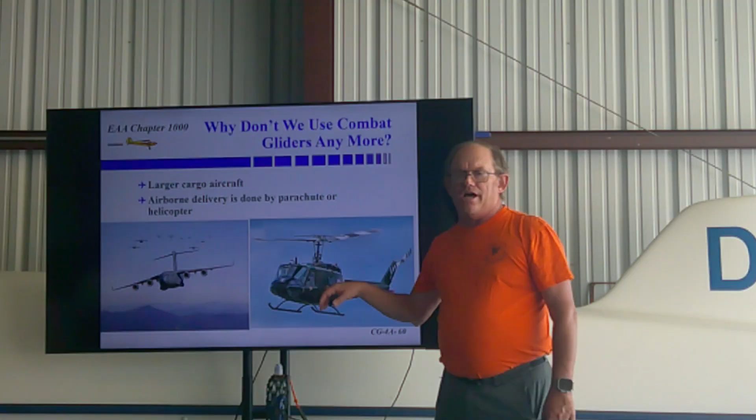Well, what about the airborne assault, putting stuff into small areas? We have parachutes now. We can fly a C-130 over and just dump it out. It goes down a lot easier. And we have helicopters. I have a picture of a later model Huey here. Remember the Waco could carry 13 troops? This will carry 13 troops. You could strap a Jeep below it. Basically, this thing can deliver the same amount as a CG-4A, put it down, and then as a bonus, take off and go back and do it again. You can use it again. Yeah. Not destroy it. Exactly.

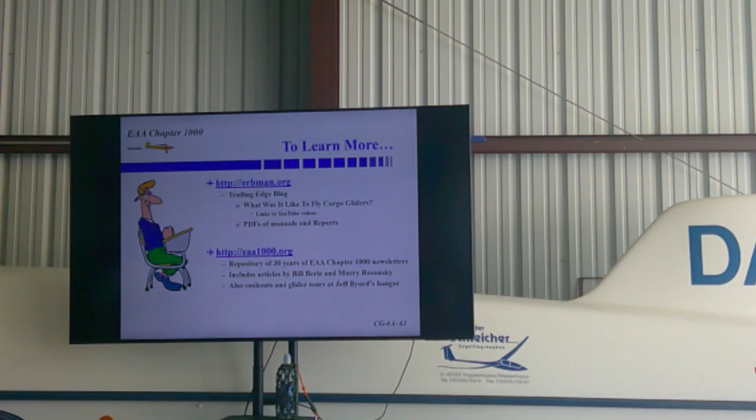I had seen something on some aviation internet forum that there was talk about trying to finally fly one of the restored ones. Is there any truth to that, or is that preposterous? I've heard of that up in Michigan. I've heard of this guy talking about trying to do that. If you've been listening to all that, about crashing stuff, it'd be kind of scary for me. I don't think it's, and I believe he said it would be easier to restore an